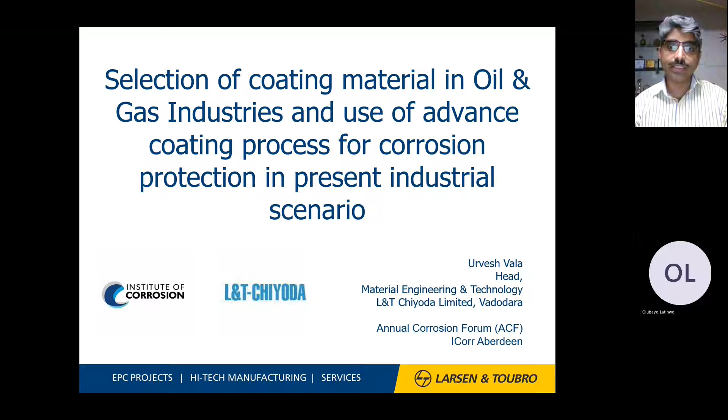Over to my topic, that is on selections of coating material in oil and gas and petrochemical industries. What are the advantages of this and how we select the coating? Just to have a content of my present talk, I'm going to talk about why corrosion control is required. Few examples of corrosion, causes leading to corrosion, consequence of corrosion control, design and fabrication requirement of coating, basic of industrial coating, types of coating in detail, compositions of coating, how it is mixed and what are the types, method of coating applications, how it is applied.

We have interesting videos where we do coating, so you can have understanding how it is applied. Then corrosion protections, how it will protect the surfaces. Then selections criteria for coating, and also for underground coating requirements. What are the types of underground coating? What are the characteristics of plant coatings in present scenario, and typical coating systems for oil and gas in general with pictures so that you can visualize how coating can support environmental and process corrosions.

Coming to the topic, why corrosion control is required? Because of the economic aspects. In recent scenario, the cost of corrosion is direct and indirect based on the types of industries which we are talking, oil and gas. So economical aspects, if corrosion is there, failure due to corrosions is directly, indirectly costing the end user and the society.

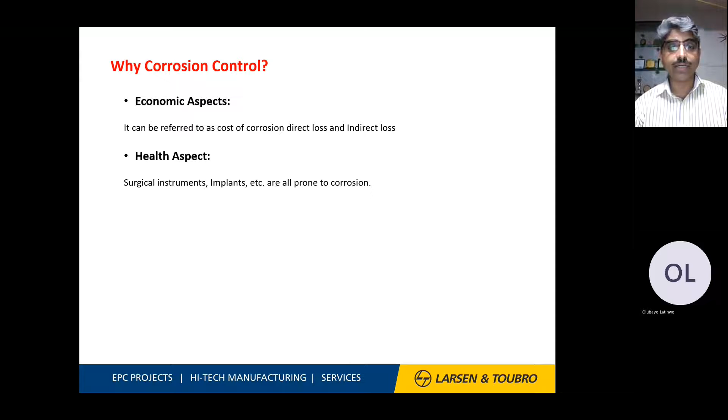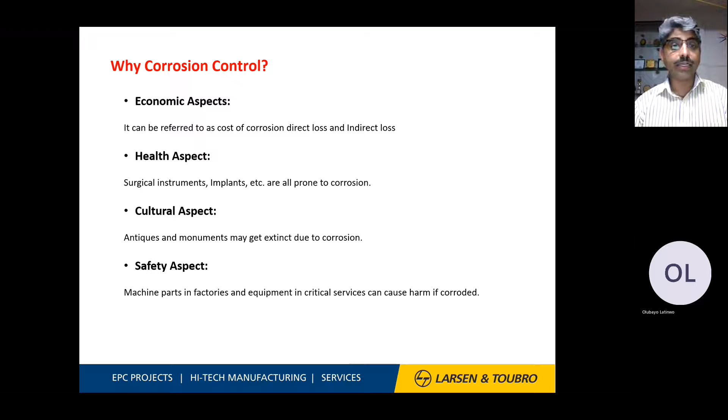It is a health aspects, like wherever there is a hazard or there is an accident, there is always challenge of humans, and humans are always challenged based on the severe corrosion damages in the oil and gas sector. Then cultural aspects, yes, of course, whatever failures due to corrosions is going to be very difficult for the society to accept in terms of human life loss. Safety aspects, yes, of course, it is going to harm the humans, and it's always our first priority to have safety during process equipment inspections and monitoring activities.

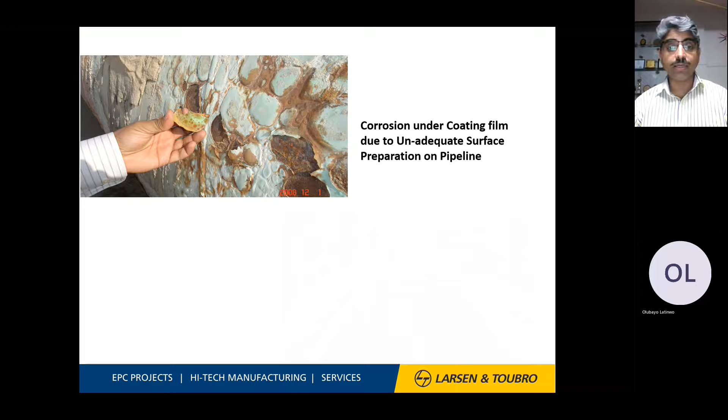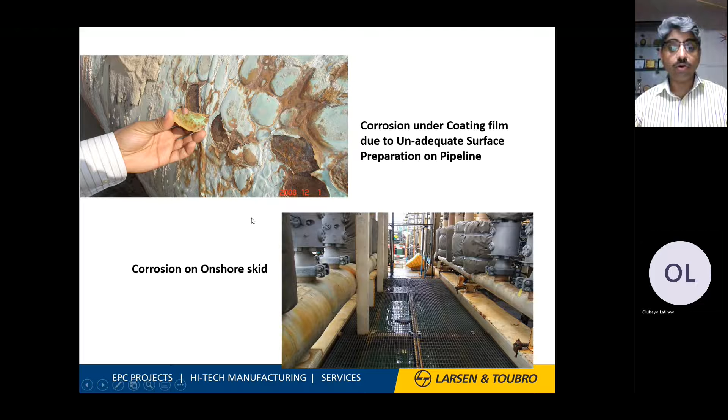Now, coming to the more critical aspects of corrosion under insulations, when we remove insulations and when we see the coating, if you see the coating, it just peels out. That is the sign of poor surface preparation over the surfaces. Similarly, if you see the platforms, they get corroded because of the corrosive products there. So corrosion on onshore skids is also a problem for aesthetic appearance as well.

Now coming to the corrosion problems which are there in industry, it is everywhere. It is in the offshore platform, onshore platform. There is a splash zone area because of the high tide and low tide. The corrosive products are accumulated over the surfaces, and because of that, it gets corroded very fast.

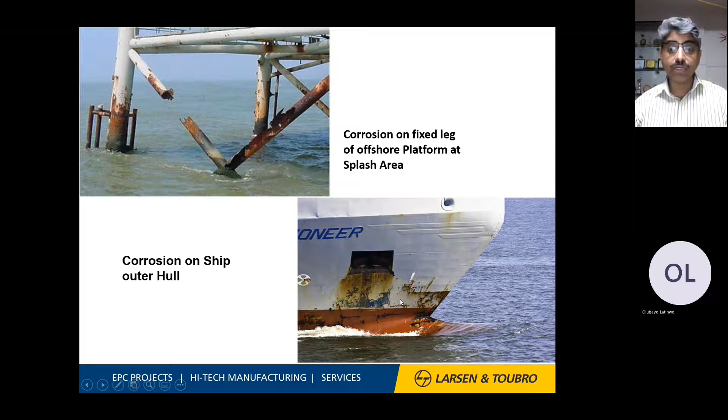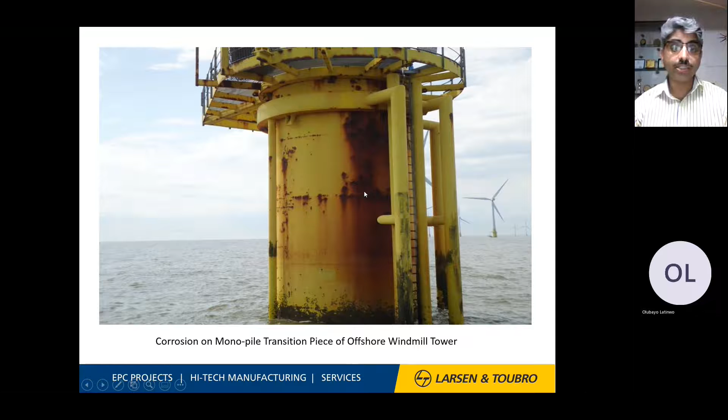There are many other causes leading to corrosion that are not limited to the operating temperatures, design temperature of any particular structures which we think of. Painting is also important. When we see operating temperature, it's always important that paints are selected based on operating temperature requirements based on the process fluid. Yes, of course, very corrosive media. You have to select corrosive category to the extreme high corrosion resistance based on the gases or corrosive products which we operate. For example, H2S, CO2, chloride, organic compounds are the major concerns for heavy corrosion or severe corrosion in the system.

There are severe ambient conditions, hot and humid climate, seawater nearby structures. Refineries, petrochemical complexes are always a challenge. So they are always near the seashore for the oil which they want to process to convert into petrol, diesel and usable form. So it is always there near the seashore, and the challenge of the chloride environment is the concern.

Improper design, yes, of course, there are certain ifs and buts for the designer. They have designed certain things where stagnant zones or corners are there, or the joints which are required are not at a higher radius, and because of that, the impingement of process fluid leads to heavy corrosion. Even there is low quality equipment and material if you choose based on cost optimization requirements. There are also certain compromises and code restrictions by which you can have some impurities as an acceptance criteria, leading to corrosive failures in industry.

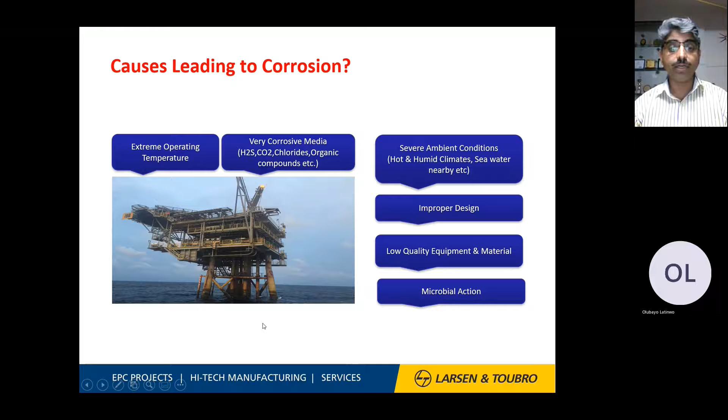Now coming to consequence of corrosion control, material selection and corrosion control for given applications is one of the main design steps towards safe and cost-effective system selection. So this is very important. If your material is not having good strength and its resistance property with respect to corrosive environment, it is leading to premature failure. So that is very much important for us to know.

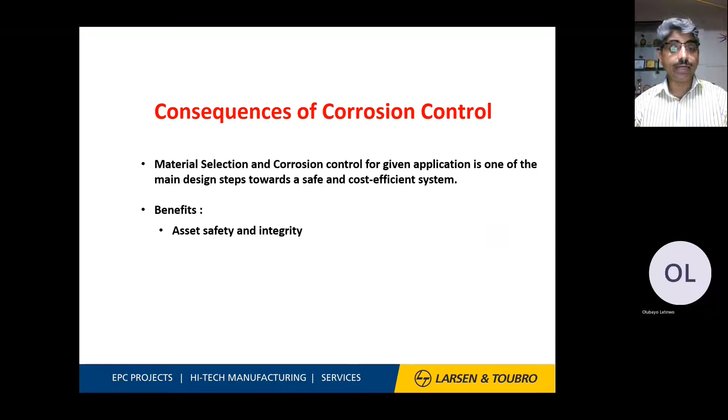The benefit of doing this is we can save our asset, and we do asset integrity management very well by selection of material. Optimize performance with minimum maintenance and shutdown. So that is again a second advantage for us to know. Longer life expectancy, because if you select proper material, proper corrosion control methods, it gives longer life. Cost saving, yes, of course, if we select the material and coating, it is going to give better life compared to the maintenance cycle of things. So if we control this, we can control more active acidic corrosion.

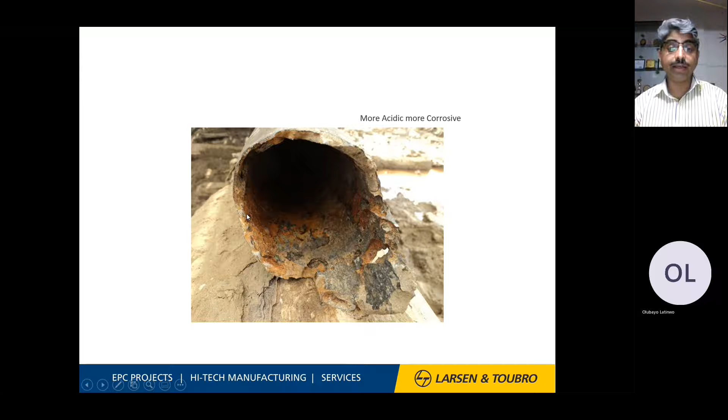If you see the picture of the pipe, it gets heavily rusted and its life is destroyed. What is the scenario? If you see this, normally this is because of gas phase and liquid phase corrosive environments which are there inside the pipe. So if there is sulfur or sulfide, it gets converted into hydrogen sulfide with the help of sulfur and hydrogen reactions. It generates H2SO4, that is sulfuric acid. So it's going to be very acidic, and because of that, pH goes down near to 2 and 3, and because of that, it is prone to corrosion. So this is how acidic corrosion is normally addressed.

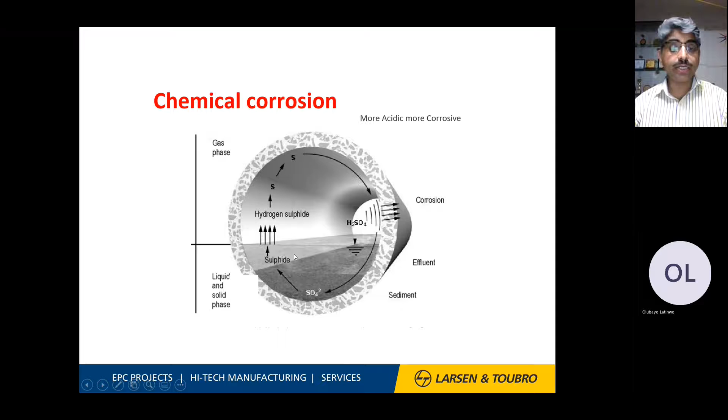So we want to control this with the help of many coating applications. We can do internal lining. So based on that, in the present scenario, H2S can be prevented by coating. Now, how these design and fabrication requirements for coatings can be understood, that is based on the preparation grade standard, that is P1, P2, P3, which is based on ISO 8501-3 requirements.

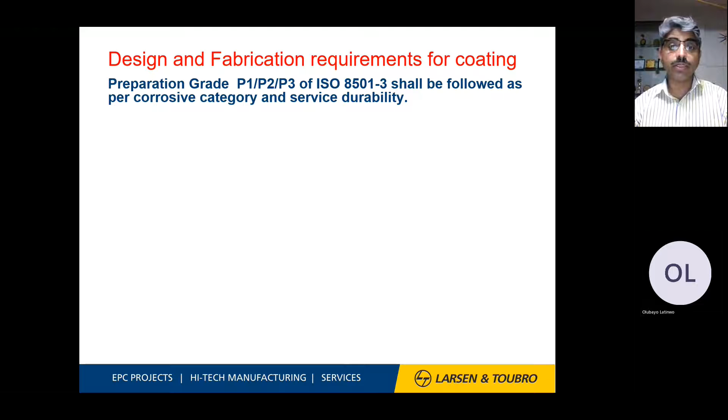Here, the category is given based on the service durability, and that gives good value for the coating which we select. The better the surface preparation, the better the quality of coating and life of the coating. If the preparation grade is P3, that is very high and a very high durability case. C4 is the corrosive environment. So C4 and higher, then it gives good surface finish. Even the immersion category, that is IM1 to IM4, also gives you a good understanding about the design of any particular coating in the corrosive area.

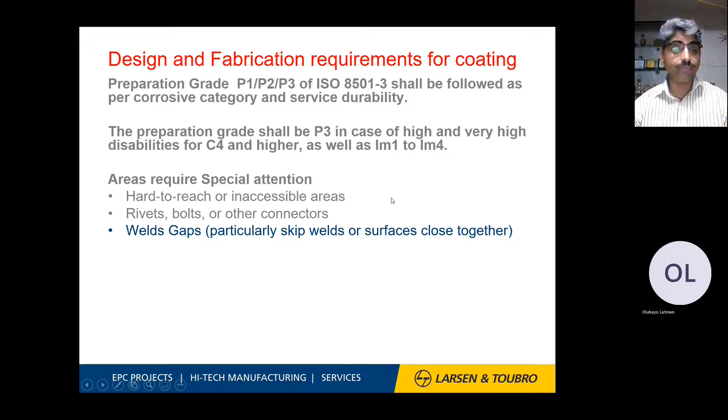Areas requiring special attention based on ISO standard: hard to reach or inaccessible areas, so blasting or mill scale removal is the challenge. Other is the rivets, bolts, and other connections where crevices are going to be formed. That is also a challenge for giving more life to the coating, as we saw in the pictures before. Other is the weld gaps, as I said for the offshore platform. Weld is the area where if you apply the paint, it is prone to corrosion because the paint does not stick to that particular surface very tightly. It is not adhered to the surface.

Other is overlapping surfaces, roof plates on the wall of tanks. Normally they have cantilever shapes. So those things are again a problem for us to have a proper coating. Angle irons badly oriented or in complex arrangements also give us poor coating applications. Thread areas are always a challenge because after painting you do bolting, and tightening of the bolts is going to eat away the coating on that particular thread part, and it is prone to corrosion.

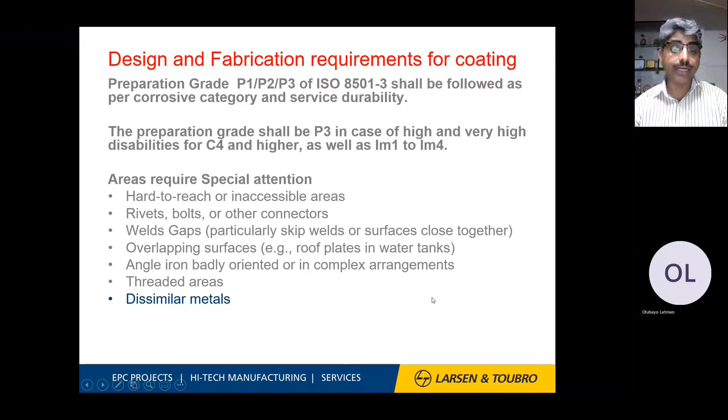Dissimilar metals. This is again a big topic for us to address. Dissimilar metals, I can talk at length. There is a one hour lecture we could give only on dissimilar metals, as this is the only area where you want to protect the more noble one by painting the surface. This is just one takeaway for this lecture.

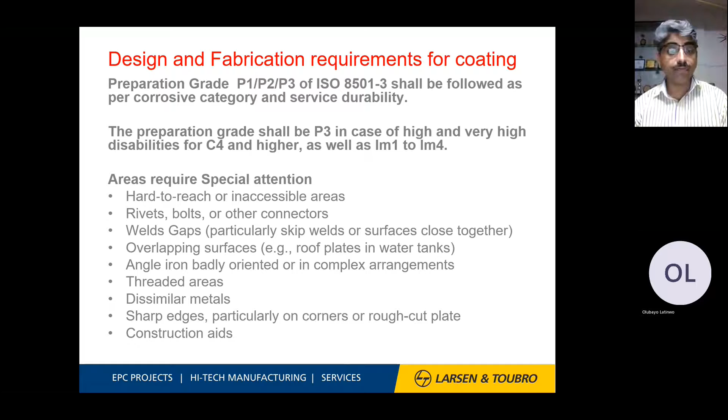Other is sharp edges, particularly on corners and rough cut plates. We have a subsequent slide where I will address this point again, that sharp edges and corners always have lesser DFT, that is dry film thickness, over the surface. Because of that, it is going to be a problem for longer life of that component, and corrosion starts from the edges. Again, construction aids. Normally, construction aids are always to be addressed when we design fabrications for any coating system.

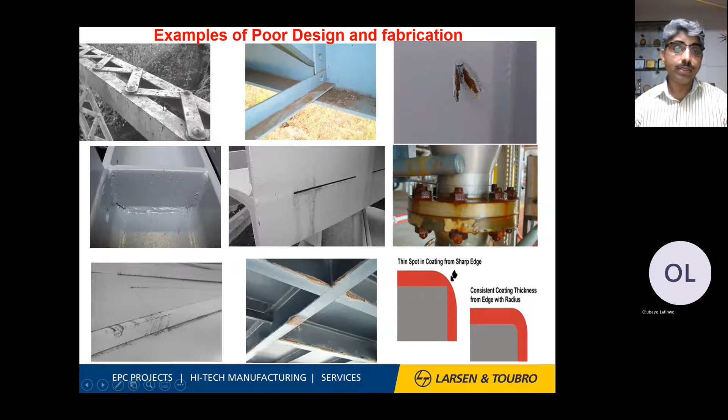This is another example where there are certain riveted joints. Riveted joints are always forming crevices, and because of that, they corrode much faster than what we think. So nowadays, this is replaced with welded joints.

Coming to all these things, then how can industrial coating be selected? What is the basis which we think of? So let us come to know the types of liquid coatings. They are broadly classified into two categories, organic and inorganic. By name, they differentiate from each other. Organic is for lower temperature. Inorganic can withstand slightly higher temperature.

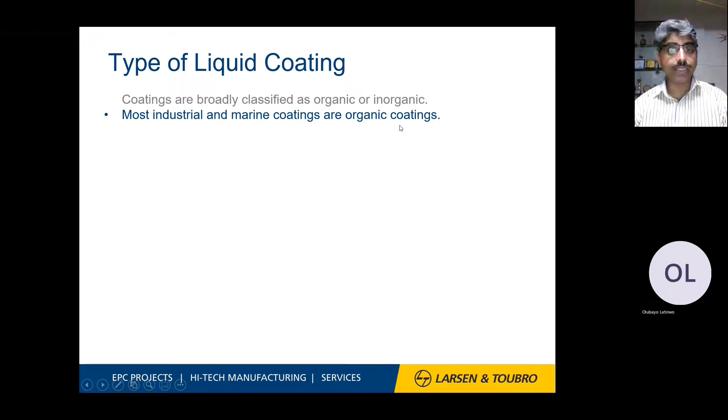All the products which are in the sea, like ships, are coated with organic coatings, and inorganic coatings are used where we have challenges based on temperature. So most industrial and marine coatings are organic coatings. They are always there for lower temperature. Normally they are made from living or once living things. And it is old technology, from the 1900s, and these things are in existence. So it's not new what I'm saying about the coating.

Organic coatings are vegetable or animal oil pigments, and normally they are used for petrochemical products, production, joints, and equipment coating. Organic coatings normally contain carbon. Inorganic coatings are more popular in oil and gas, having a binder most commonly based on silicon or silicate. This is the base by which the paints are known by name, silicon base or silicate base.

The major difference between organic and inorganic coatings is heat resistance. Inorganic has more heat resistance than organic coatings. Organic coatings have lesser resistance because of the relatively weak carbon to carbon bonds. Because of that, they are normally good for low temperature applications, whereas inorganic coatings have more applications in oil and gas. Now, people will want to know what components a coating normally has. We say coating means one layer, two layer, three layer, multi-layer coating. No, it is not so.

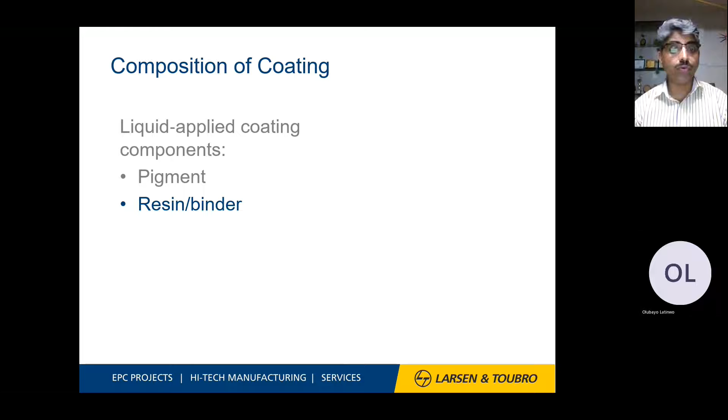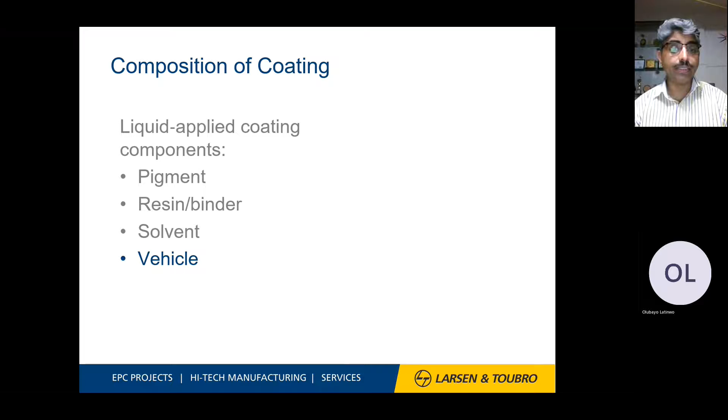So there are two terminologies, wet film thickness and dry film thickness. Wet film thickness is with all these components as listed, pigments, resin, and solvent. When solvent is removed from the paint into the environment, whatever is remaining is pigment, and that pigment is nothing but the dry film thickness of any coating. So this is what the vehicle is. Vehicle means resin and solvent.

So these two bind with the pigments, then these two things get out of the system, and whatever pigments are there are nothing but the life of that particular coating. Or you can say that it is the only component by which you can get the dry film thickness. Generally, the ratio is 20% so that you have a proper dry film thickness over the surfaces, or DFT in terms of microns, that can be achieved.

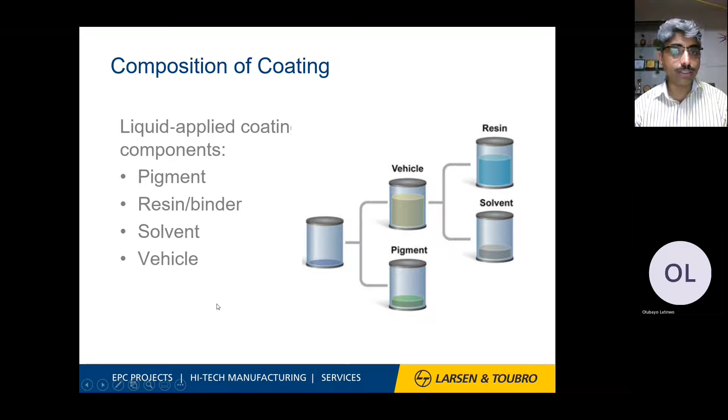Now coming to the methods of coating application, that is airless spray. Let me give you one example. Airless spray can be used to apply coating, but generally airless spray is not good for zinc silicate primer. For that, you have to use a spray gun which is not airless type.

Other methods include brush and roller with a mechanized system, and airless spray. Nowadays robots are there in the picture for us to know. Now let me show you some videos.

In a good spray pattern, the paint or material sprayed is completely and evenly distributed onto the surface. In this video, we'll cover several techniques you can use to ensure a quality finish. In this section, we will discuss spray patterns and spray techniques.

Before starting your project, if you don't have a lot of experience with spraying, use some scraps of cardboard to test the quality of the spray pattern. You could spray a large flat area, like the side of a house, that's not easily seen, or practice with water. Just make sure you let the surface dry completely before applying your paint.

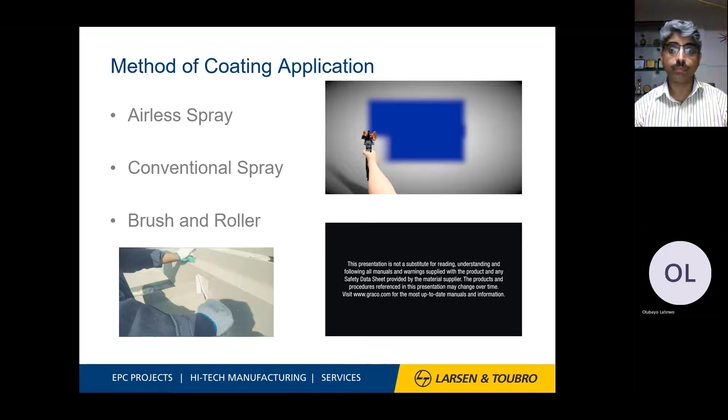Your arm should be moving when the trigger is pulled and released. This will create a nice fuzzy edge around the entire spray pattern so your next pass will blend into the previous pass. Rotating the guard changes the pattern to either vertical or horizontal orientations.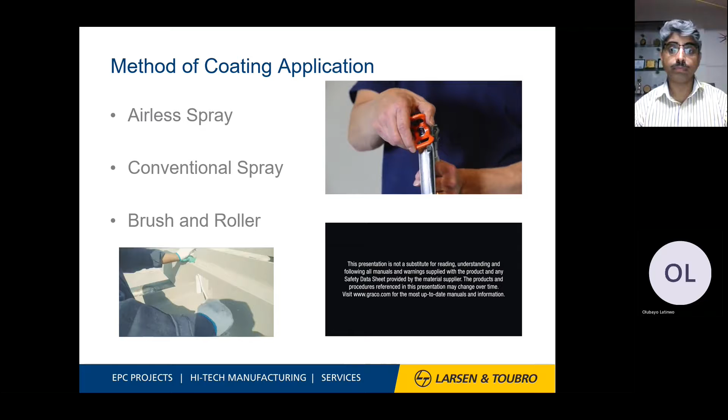When spraying on broad open surfaces, such as ceilings and bare walls, the outside edges should be sprayed first, then the middle can be sprayed more quickly. For vertical corners, turn your guard so the spray tip is on top and aim your gun into the corner. Spray along the corner, applying an even amount of material along both sides.

Typically, when painting, it's best to start at the top and work your way down. Begin by spraying any eaves or the underside of overhangs. The direction you spray is determined by the construction. As a general rule, spray horizontal and make sure you direct the spray up a little to spray the bottom lip of your siding.

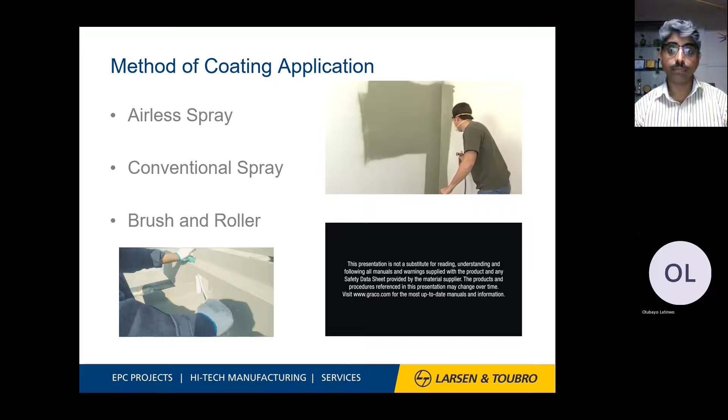With a little practice, this easy-to-use sprayer will have you spraying like a pro in no time. Remember, point the gun straight at the wall without tilting up or down or angling left or right. Start moving the gun before and after you trigger. Move at a consistent speed, and when spraying, overlap the prior spray pass by 50%.

Allow enough time for paint to dry before removing tape from your trim. This will result in crisp, clean lines.

The video shows application on a wall. We always think about this based on our applications, but the guidelines are common for steel equipment or structures too. These guidelines cover how to apply and maintain airless spray distances, and how it's applied with 50% overlapping as the requirement.

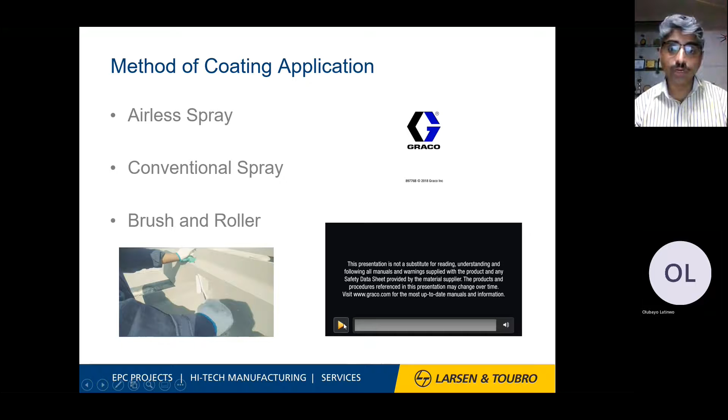So this is what I take away from the video. The next video explains how sprays can be applied over surfaces - let's listen to that and then discuss.

It may seem like a recent invention, but the act of spraying paint has been around for thousands of years. In fact, Stone Age man used hollow reeds to spray pigments to create cave art. But just like most technologies, spraying has evolved and advanced over time. Today, there are 4 main types of spray delivery methods.

Air spray systems use highly pressurized air created by a compressor to atomize the fluid being sprayed and deliver it onto the work surface. High volume, low pressure, or HVLP systems also utilize compressed air, but differently than standard air spray systems. With HVLP, a turbine delivers a large volume of air at a much lower pressure to atomize and spray the fluid.

Airless spray systems need neither a compressor nor a turbine. Rather than rely on air, these systems use a pump to deliver fluid at high pressure to the spray tip. They deliver fast speeds and spray the widest variety of materials.

Air-assisted airless systems combine airless and air spray methods. An airless spray fan has compressed air added to soften the spray fan.

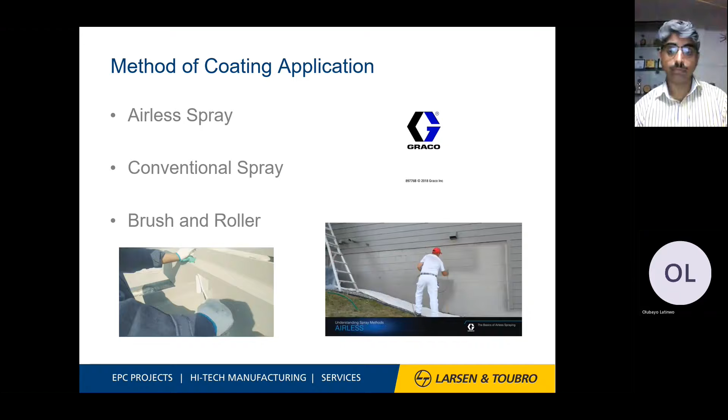When it comes to achieving professional painting results, being able to quickly apply the coating you're using in an even, consistent manner makes all the difference. Airless spraying allows you to do just that, plus it's faster and easier than using a brush or roller.

In fact, using an airless sprayer is up to 10 times faster than using a brush, and at least 4 times as fast as a roller. So how is it done? Airless spraying achieves this speed by atomizing, or breaking up, the fluid into small droplets without the use of compressed air. Instead, fluid is pumped under high pressure through a spray tip.

The fluid emerges from the tip as a high-speed solid stream, but when that stream hits the air, it becomes disrupted, and the fluid separates into very small droplets that form the spray pattern. If you've ever placed your finger over the end of a running garden hose, you created a very simple form of airless spray. Since 1958, when Graco invented airless spraying, professional contractors have preferred this method of spraying for many reasons.

Speed: because airless spraying is faster, more jobs can be completed in less time, using less labor. Plus, it's great for jobs with a short weather window.

Quality: airless sprayers produce an even coat of paint, referred to as the mil build, on all types of surfaces, leaving a high-quality finish.

Versatility: airless sprayers can be used for a wide range of coatings for both interior and exterior jobs, and can easily be transported around job sites. So what is airless spraying? Simply, it's the fastest and most versatile way to achieve professional painting results.

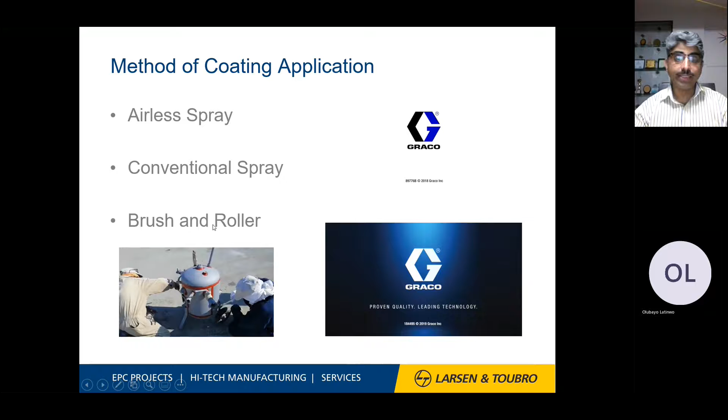So that's it from this. These are the things important for us to know. All techniques are important - they have their own merits, plus and minus. Based on that, we have to apply this for our applications.

Now coming to corrosion protection. With all these techniques, whether we apply with spray, airless, roller or brush, what it will do to the job is corrosion protection, in four ways: barrier protection, inhibition or inhibitor protection, sacrificial, and combined - either two combined or all three together. So B stands for barrier, I stands for inhibitor, S stands for sacrificial, and C stands for combined.

So that is what we are going to select coating based on many criteria. The first criteria for coating is the substrate material, or base metal - whether it is carbon steel, stainless steel, hot dip galvanized steel, or non-ferrous aluminum surfaces. Any surface you can coat. For example, aircraft is of aluminum, lithium, copper alloy, so you find good coatings over the aircraft - that's nothing but a coating on aluminum.

Hot dip galvanized is used for our pipelines, which is for fire safety lines, painted with hot dip galvanized steel. Stainless steel and carbon steel equipment and pipings are painted based on several reasons. Carbon steel, of course, because it forms an oxide over the surface, so coating is always good for increasing the life. Stainless steel is normally painted because of other reasons.

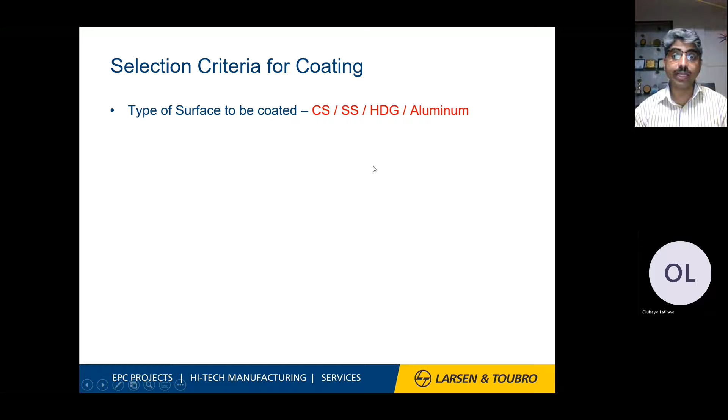That is nothing but minimizing chloride stress corrosion cracking. Under insulation, stainless steel is always good to paint, or you have to put aluminum foil, which is going to isolate the insulation from chloride environments. Or there is a gap in insulation which creates problems on the stainless steel surface over time, and improper insulation gaps lead to premature failure of stainless steel pipes. The other criteria is service conditions - operating temperature.

Normally open to atmosphere - this is the maximum case for equipment. Normally all refinery equipment is in this environment, so open to environment or open to atmosphere is a requirement which is very important for us to know. Under insulation corrosion is more important, though it's not directly visible to us. So there are many non-destructive testings available which can identify corrosion under insulation.

That is the second point. For CUI, there is a special NACE standard, NACE SP0198, which says how to do coating for under insulation applications or under fireproofing applications. High temperature is again a challenge because the maximum upper temperature limit is 650 degrees C for any painting selection. Beyond that, there is not much corrosion because there's not much water phase available for reactions, so no much corrosion is expected - even carbon steel we can put without coating, and it will have life at that particular temperature.

Other criteria is cyclic service. Yes, there is a very versatile paint called inorganic copolymer available, which is normally a versatile solution for cryogenic temperatures to high temperature - minus 196 degrees C to plus 650 degrees C. This inorganic copolymer paint is very popular nowadays in oil and gas industries.

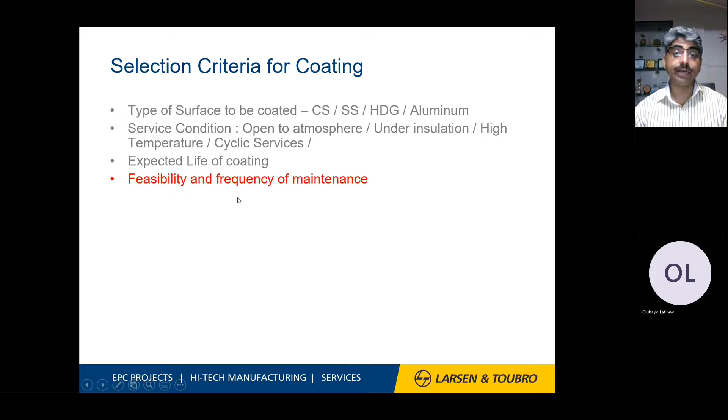Then feasibility and frequency of maintenance is also a criteria for coating selection. If you have a lower frequency, or you can say the cycle time is higher, say 5 years, you do one particular coating with a DFT - dry film thickness - which gives more life. If it is lesser, say 1 year or 2 years, you have to change your coating system and refurbish the coating based on the life of that particular maintenance cycle. So your asset integrity team is the team which decides this particular cycle for maintenance.

HSE requirements, that is a statutory requirement. Yes, of course, where there is a toxic gas, there is HSE involved. We have to be very strict on equipment design as well as coating type, because there are certain paints nowadays available which tell you, when they change color, that corrosive gases are in the environment. So those are the indications for us to address the coating.

So this is a very good topic for us to address, because this HSE requirement we can discuss at length, and it has very good merits nowadays for understanding the discolorations, or the change of colors based on the gas which is coming out of that particular piping.

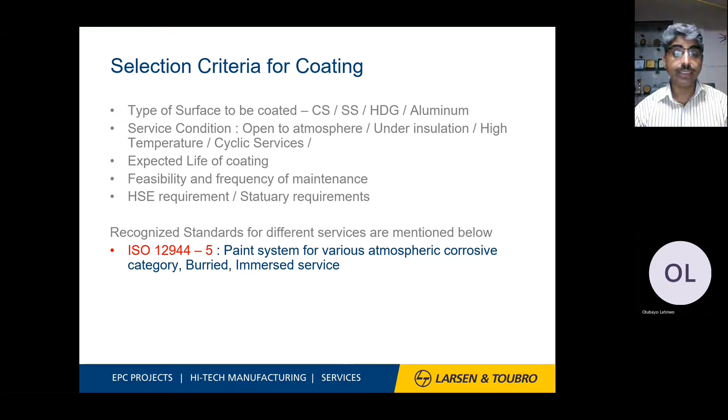Now, recognized standards for different services, like ISO 12944-5, that is normally there for the environmental coating requirements. In a similar way, NACE SP0198 is for corrosion under insulation paint or under fireproofing paints, which is normally categorized into the NACE SP0198 coating system. So if you know these two standards, you can select any coating based on these two codes, whether above ground or in the environment, or underneath any insulation or fireproofing.

Now coming to the compatibility chart, you can have a compatibility of X and Y, epoxy to epoxy. Y is yes, N is no, and Y with remarks means you have to refer to the notes. So you can have a good comparison for any particular pigments, such as epoxy, coal tar epoxy, epoxy mastic, alkyds, silicone alkyd, polyurethane, or bitumens, any particular paint. Vinyl ester again has good properties based on higher DFT.

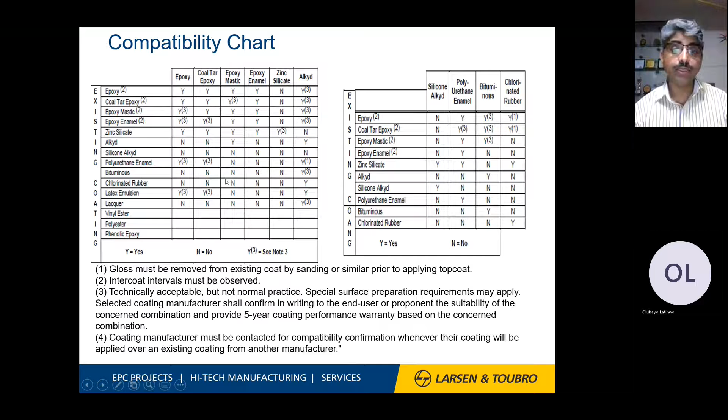Then phenolic epoxy. So you can compare any paint with any other, and you can choose the combination of two paints for your applications. Yes means you can use it, no means you cannot use it. There is a system called single pack and multi-pack, and based on those, these particular charts are designed.

Now coming to the corrosive environment category, which is listed as per 12944. I just repeat, 12944-5 is the coating design requirement, whereas the corrosive environment category is by -2. So for environment-related corrosion, C1 is very low, like the AC environment we normally sit in. Going towards corrosive environments, it increases to C2, C3, C4, C5, which is very high corrosive environments based on industry. Near the seashore, corrosive industries, chemical industries, petrochemical complexes are all categorized into C5, the very high corrosive category.

In a similar way for immersion services, IM1 is for fresh water, meaning there is not much corrosion because of the good quality of TDS, that is the sulfides, chlorides, or other solid ions carried by the water. IM2 is sea or brackish water without cathodic protection. Under the immersion and buried categories, there is always CP, cathodic protection, in many applications, and if the soil has very high soil resistivity, cathodic protection can be eliminated. So IM2 is the category for those particular services.

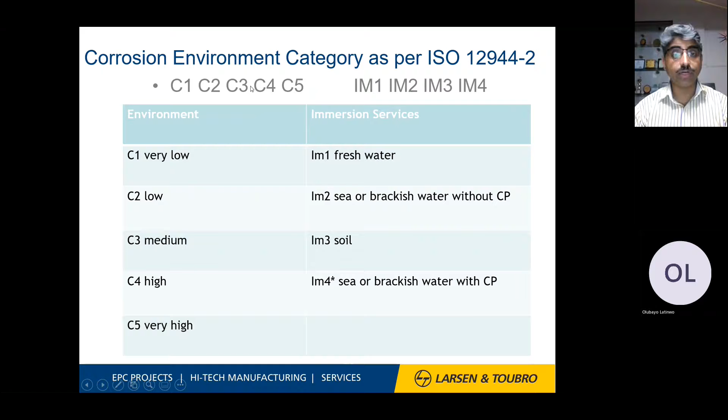Now coming to the corrosive environment category, that is C1, C2, C3, C4, C5, which gives you the above ground category. IM1, IM2, IM3, IM4 are for the immersion service category. So the takeaway from the lecture is that whenever somebody says C4, C5, that is a heavy corrosive environment. Similarly, IM4 is for CP. So this is about corrosivity.

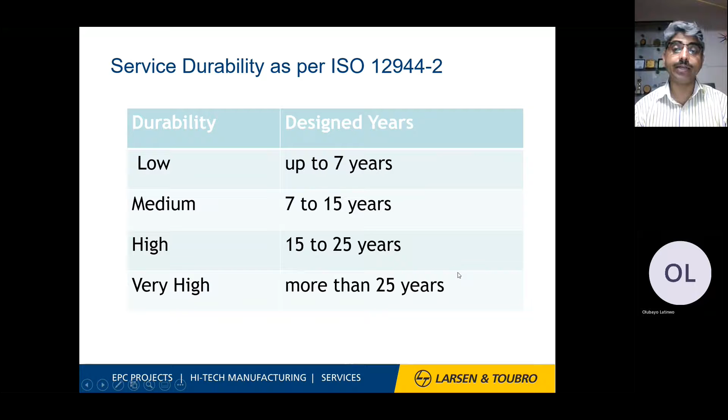Now, durability. Service durability is nothing but the life of the coating which you select, also based on ISO 12944-2. Low durability is up to 7 years, so you have to apply paint whose life is 7 years. Medium is 7 to 15, high is 15 to 25, and very high durability means a good quality paint lasting more than 25 years. But of course, you have to take care of many design aspects which we discussed before.

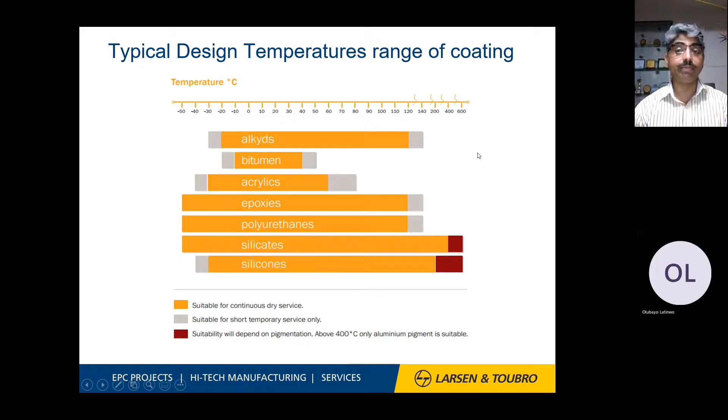Now coming to underground coating, there are traditional specifications for coating for plant piping, listed based on the product type: straight pipes, welded joints, miter bends, tees and taps, buried valves, buried flanges. So based on the product form, there are various standards available which we can compare to get the information on what types of coating we have to do.

For example, if we have straight pipes, that is plant coated CTE, that is as per AWWA standard, AWWA C203, or IS 10221, that is the Indian standard, and BS 4164, the British standard, which is applied in the range of 4 mm thickness. 4 mm is nothing but 4,000 microns DFT, or you can use the DIN standard, the German standard 30670. You can apply it for such straight pipes, and it is normally shop applied and more popular.

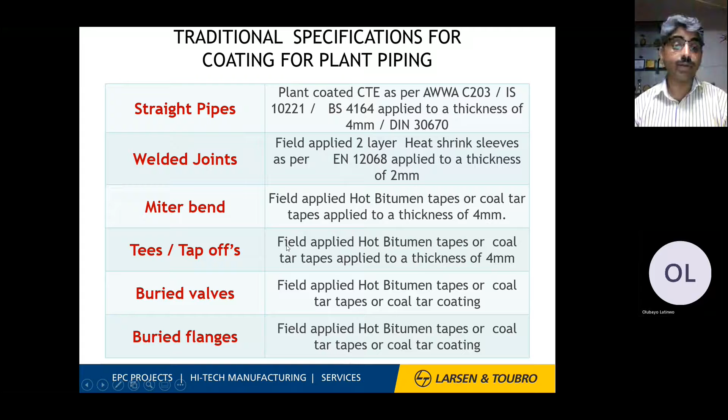Other is hot bitumen tape, or coal tar tape, which is there for valves and fittings, which we can apply at the site or even at the shop. Similarly, you can have hot bitumen tapes up to 4 mm, or cold applied tape, or coal tar tapes you can apply for 4 mm thicknesses, which are available for all other products: bends, tees, valves and fittings.

Now coming to traditional coating, that is polymeric coatings: 3LP, 3-layer polyethylene or 3-layer polypropylene coating. Or you have different plies, 3-ply and 2-ply, that is 2-layer and 3-layer coating. So these are the categories. Both have merits. It can be applied in the factory and in the field.

So wherever there is good quality in the shop over the straight pipes, you can apply 3LP, and at the field you can use 3-ply and 2-ply coating. So this is a combination of coating which you can choose for the temperature range. This can be used up to 120. The field applied has a restriction of 50 degrees centigrade. Normally it is for buried applications. The thickness range is 2 to 3.3 mm based on the applications.

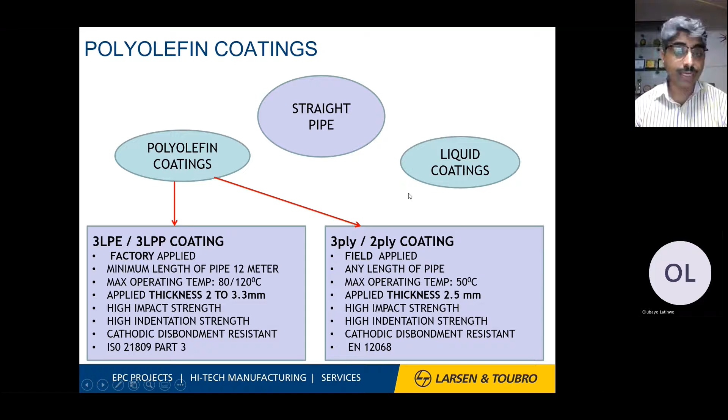Good impact resistance for site conditions. High indentation strength because of laying down the pipes. Cathodic disbondment resistance because of the cathodic protection requirements. You can read ISO 21809 part 3 for 3LPE and 3LPP coating, and same way EN 12068 for 3-ply and 2-ply coatings. These standards tell you in detail about the coating. You can reach out to me if you have any questions.

Other coating is called liquid coating, applied with the pigments we saw before. It is always field coating, applied with brush or spray, or only by spray if it is polyurethane. If it is high build liquid epoxy, which has higher DFT, it can be applied with brush and spray at shop and site. Normally the site uses this technique more because it is easy to apply at any elevation.

So any length of pipes, maximum temperature resistance is 150. Thickness range available is 0.6 to 1.5 mm, and all the properties are the same as before: good strength, impact, indentation, and cathodic disbondment resistance. So these are the things which are important for us to address for the liquid coatings also.

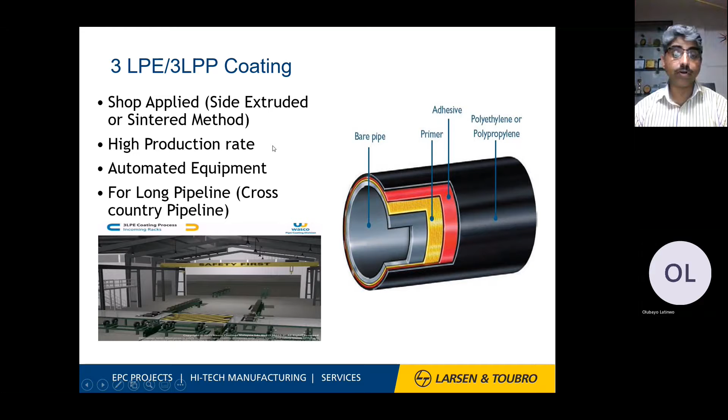Now 3LPE coatings, how it looks, how the process is. On the bare pipe you apply the first layer, a primer, then you apply adhesive material, that is the second layer, and then you apply polyethylene or polypropylene. So based on this particular type of coating, it is called 3LPE or 3LPP. This is all based on the applications and temperature requirements for selection.

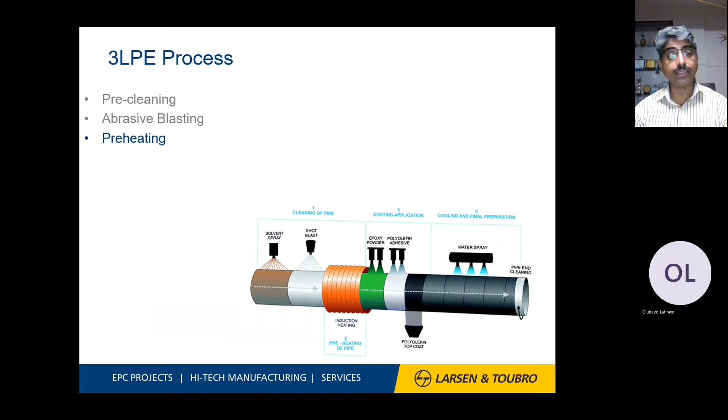Coming to the 3LPE process: normally pre-cleaning, then abrasive blasting, then preheating, then the first layer application of epoxy powder, then the second layer of polyethylene adhesive, and the third layer is polyethylene or polypropylene, by which you close this particular process. The only limitation is that it is only applied in the shop, not in the field. And you have to do cooling.

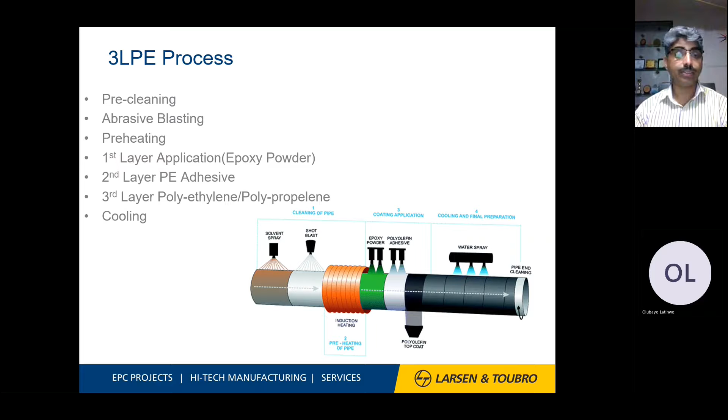Yes, of course, because it is a hot process. So at the end, you have to do cooling so that it gets settled over the pipe and gives good adhesive properties. So this is all about 3LPE and PP.

How to go for ISO 21809 requirements for external coating in buried and submerged pipeline applications. There are 3 classes, A, B, C, based on the top layer material, that is LDPE, MDPE, HDPE, and PP. PE stands for polyethylene, PP stands for polypropylene. These are combinations of polyethylene and polypropylene material resistance based on the design temperature of the coating. So -20 to +50 or +60, this is the range.

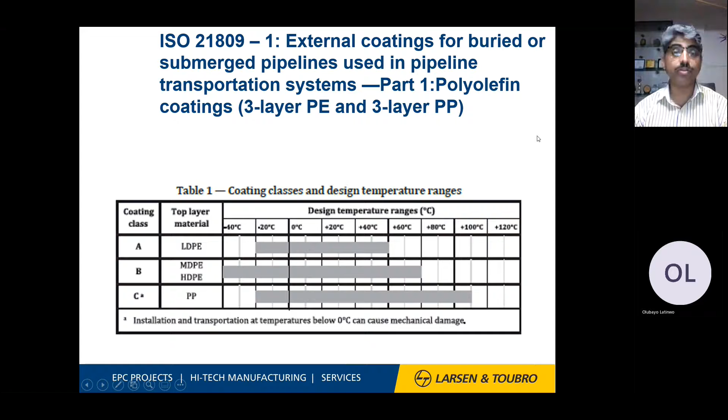The second, B category, goes slightly higher, say 80, and polypropylene can withstand very high temperatures, say up to 110 degrees centigrade. So it is possible for us to go and read the standard. So 3-layer polyethylene and 3-layer polypropylene temperature resistance is not much; more than 110, it is not generally used because of its applications in underground service.

What are the steps for this? Again, it is similar to what we have for 3LPE, 3LPP: pre-cleaning, abrasive blasting, pre-heating, FBE application, and curing. So this is how things move. And lastly, of course, testing that it is well bonded over the surface. So this is how the cycle moves, and we have all the steps till dispatch.

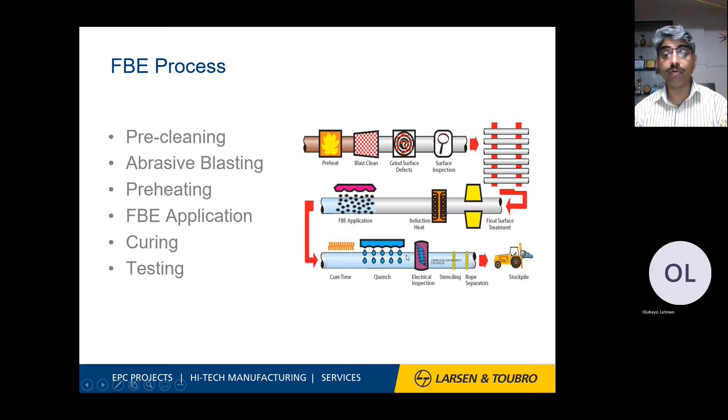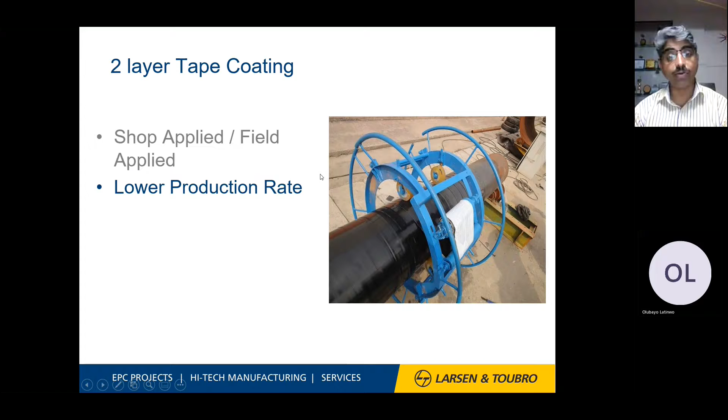The next coating for underground is 2-layer tape coating. This is what the coating looks like. This is the machine or applicator doing the application, and they just move it over the direction of the coating, so it's progressing from this side to this side. This is a shop and field applied coating. It's a low production rate because you have to apply it manually, or you can do semi-automatic application.

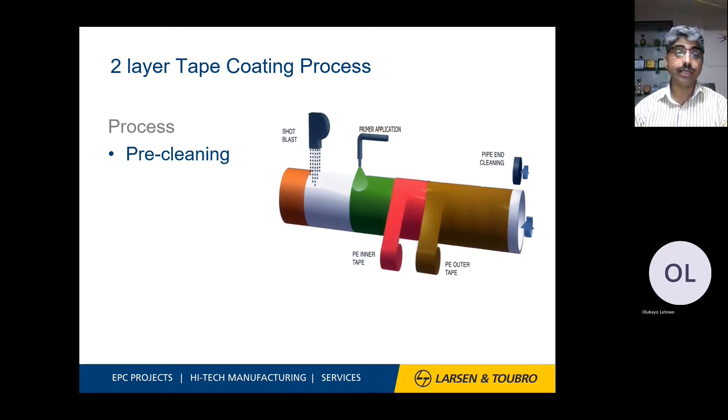Based on this, you can apply this particular coating, called 2-layer tape coating, with the process of pre-cleaning, abrasive blasting, primer application, and then PE inner tape coating and PE outer tape coating. And then after that, testing for the quality check. So this is how things are addressed in coating in field and at shop.

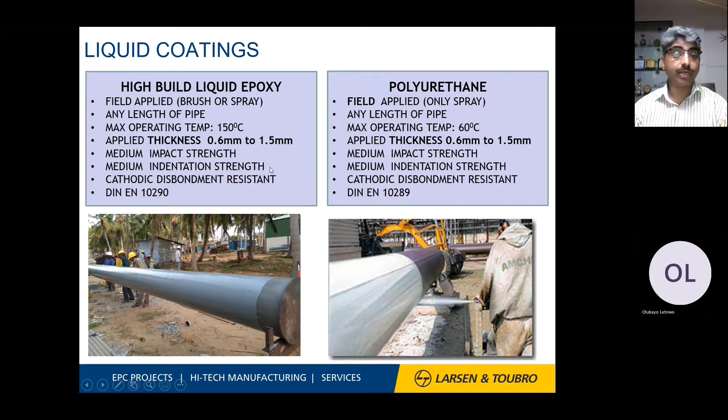Liquid coating, that is high build epoxy, liquid epoxy and polyurethane. The temperature for polyurethane is 60, whereas here it is 150, so it has high temperature applications. This one is applied by brush and spray, so it's easy to apply. This is only by spray. And other parameters are almost the same for all: cathodic disbondment, impact and indentation properties.

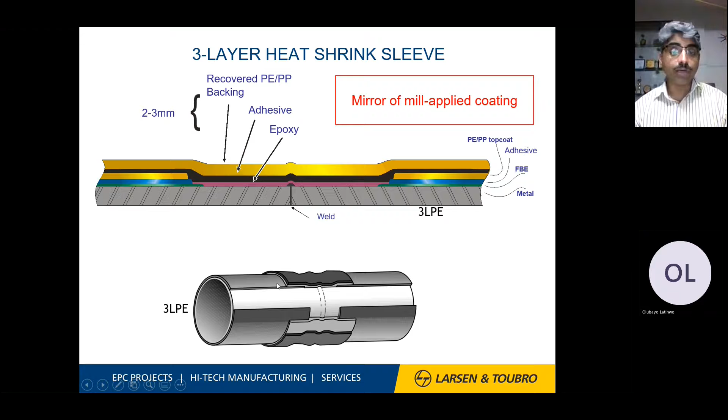Then you have to apply adhesive. Then you have to apply polyethylene and polypropylene backing. This is in the range of 2 to 3 mm. So it's very high quality coating which we can have for any site application requirements. So this process itself is called heat shrink sleeve. Compared to normal epoxy coating applications, this is a costly one.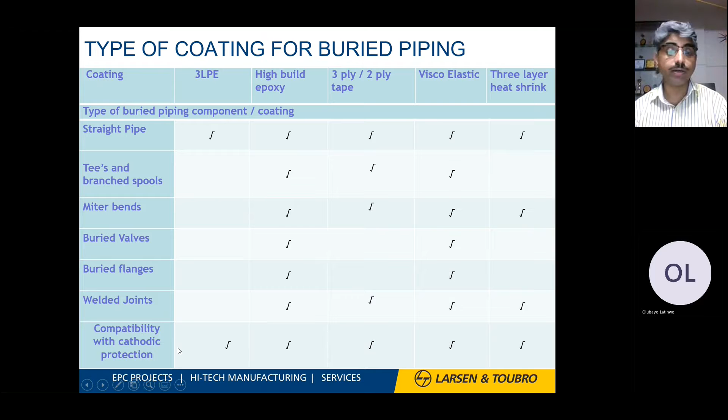So there is only this limitation. Only straight pipe and compatibility with respect to cathodic protection is achieved for all the joints because it is for underground applications. So this property must be met for all the coating types. So this is good for straight pipe as well as all other processes which we have already discussed. Now this is one example.

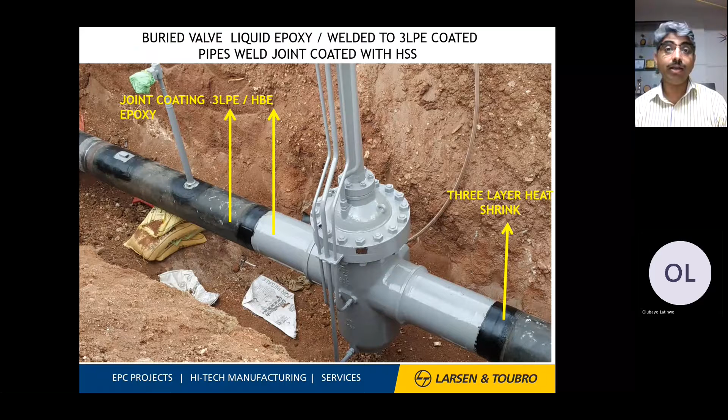I am just putting a question to all the participants. I have all the painting coating requirements. You can see that one is 3LPE. Then I applied certain epoxy. Then I applied 3-ply, 2-ply. If I combine all these coatings together, I want an answer from all of you: which coating gives more life based on all these different coatings we learned? Please write to me once you understand the code standard which I have shared and how it is to be read based on the life of coating which we have to select for UG applications.

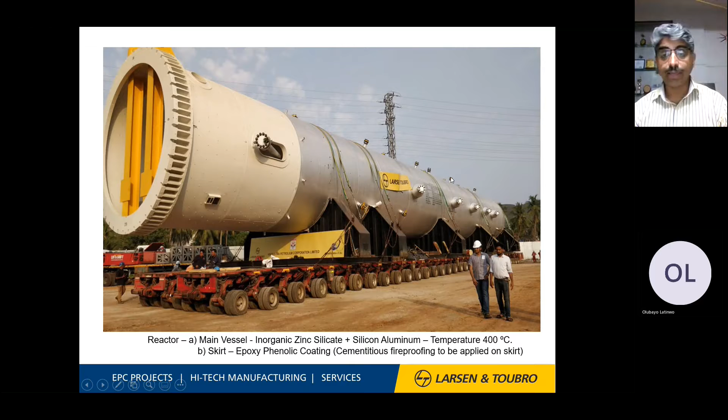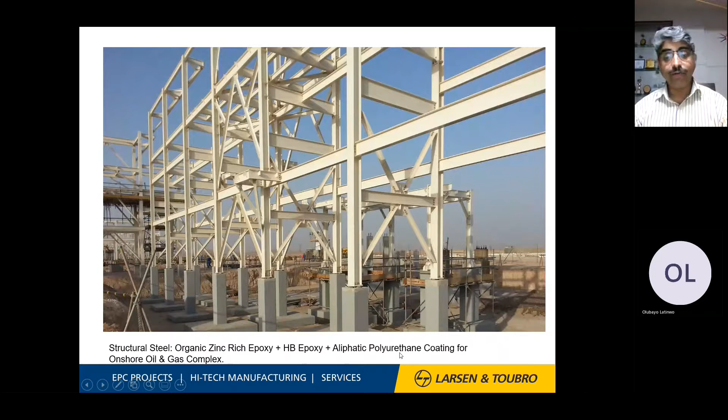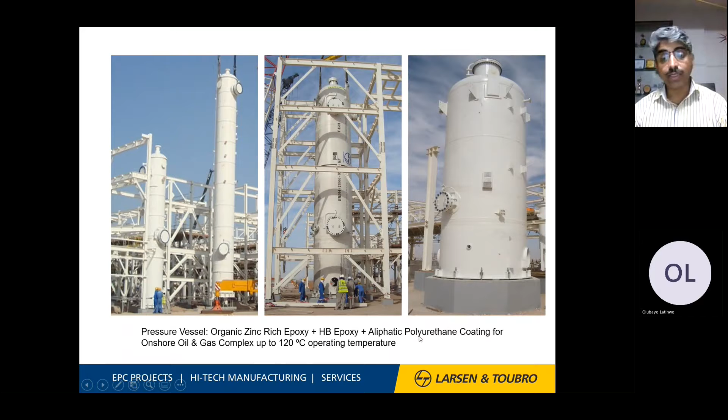Similar way, a structure in a normal environment where you can apply zinc silicate followed by high build epoxy, then aliphatic polyurethane coating for any oil and gas structures. If you have pressure vessels for the 120 degrees centigrade temperature range, you can use zinc silicate or zinc rich epoxy primer, high build epoxy, aliphatic polyurethane for the color.

Similar way for under insulation, say for 200-degree temperature, you can apply this. Cleats are indications that there is insulation over this particular vessel. So you can apply epoxy phenolic coats, which are high temperature resistant. This is all the high pressure flare area. These are all the lines and pipings which we see. So this is always at high temperature, 540 degrees centigrade. The paint is silicon aluminum.

This is for the stainless steel stack, because the chimney is always operated at high temperature. So structures are always withstanding high temperature. Carbon steel can resist up to 450 or 425 degrees centigrade temperature. So normally these structures are of stainless steel.

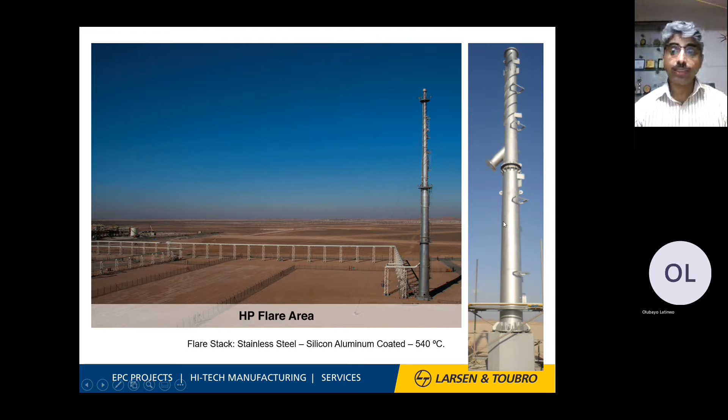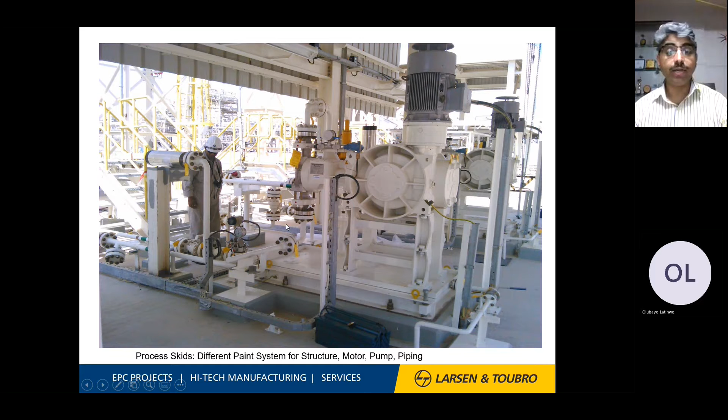These are the skid mounted motors and other piping structures that normally use different painting systems. You can see the yellow paint system, white, and the different color systems for the motor. So this is all based on different coating systems chosen for particular applications for an oil and gas process skid package. Similar way, the structures coated yellow are for the walkways where persons can walk, and the other is a process vessel structure. So that is painted in a different color.

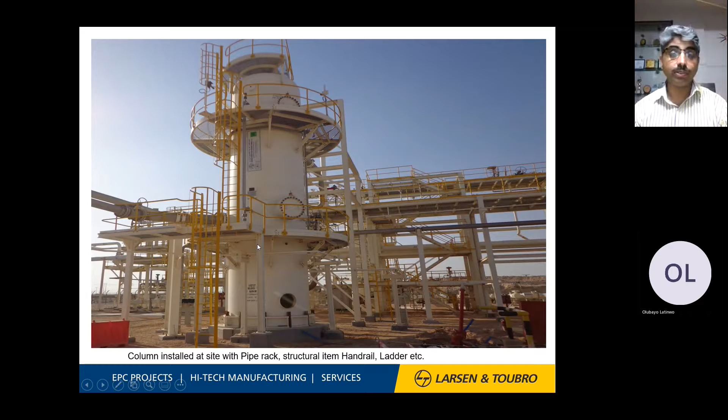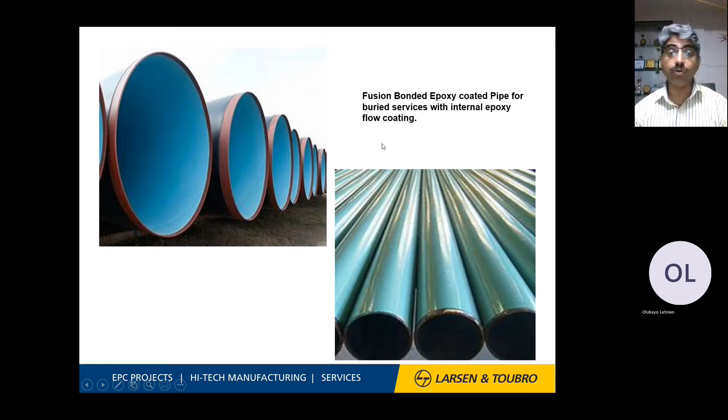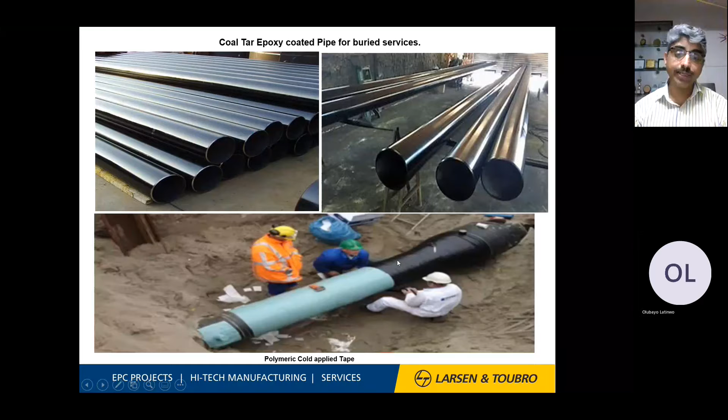This is coal tar epoxy coating, black in color, how it is applied at the shop and how it is applied at the site. So the colors are different at different applications. This is polymeric cold applied tape coating. So this is different than the coal tar. The tape is manually applied. 50% overlapping, of course, is there.

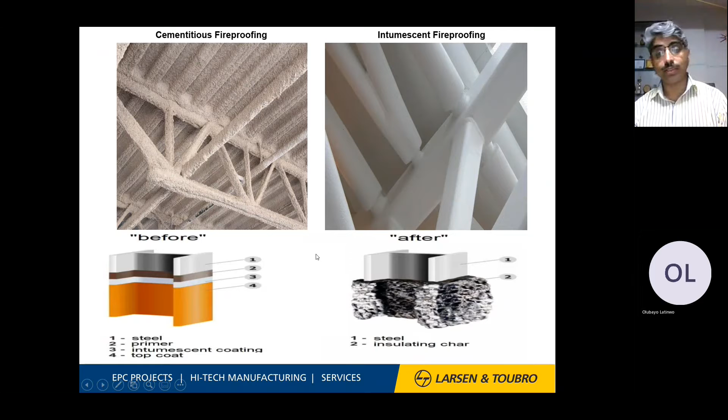This is about the cementitious fireproofing requirements. This is how the coatings are applied: 1, 2, 3, 4 layers, steel surface, primer, intumescent coating and top coats. After fire, you can see it is like this, it gets expanded. So it is protecting the structure so that the temperature won't reach the structure. So this is how it looks after fire.